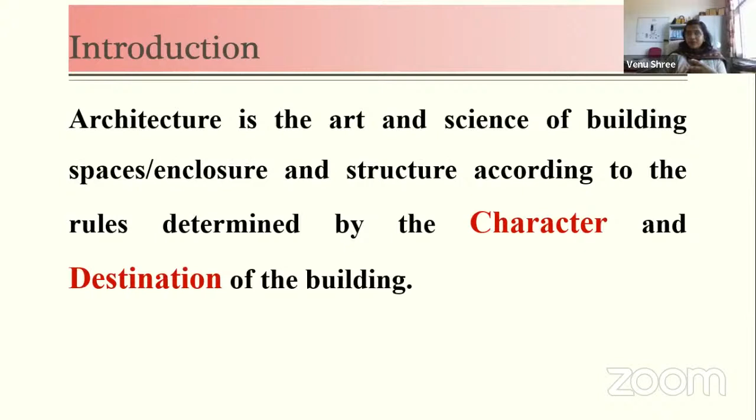Whenever I ask you what architecture is, your answer would be: architecture is the art and science of building spaces, enclosures, and structures according to rules determined by the character and the destination of the building. So there are two terminologies: character of a building and destination of the building. Character indicates a particular style of a building.

We have a specific style in early traditional Indian architecture of temples and forts. We have a particular style of churches, mosques, offices, modern buildings, and contemporary buildings. Every building has a particular style, and that style is related to the utilitarian aspect of the building. What utilitarian aspect is: it is related to the function of the building, the utility of the building, and the durability of the building as well.

Le Corbusier once said every building should have a character, just like a human being. As every human being has their own individuality, similarly every building should have its own character. The character of a building may evolve from a suitable combination of aesthetics and principles of design to evoke certain visual and psychological responses of the user—meaning the occupant or visitor of the building. And what are the principles of design? You all know they are rhythm, balance, emphasis, proportion and scale, movement, contrast, and unity. You have already studied it.

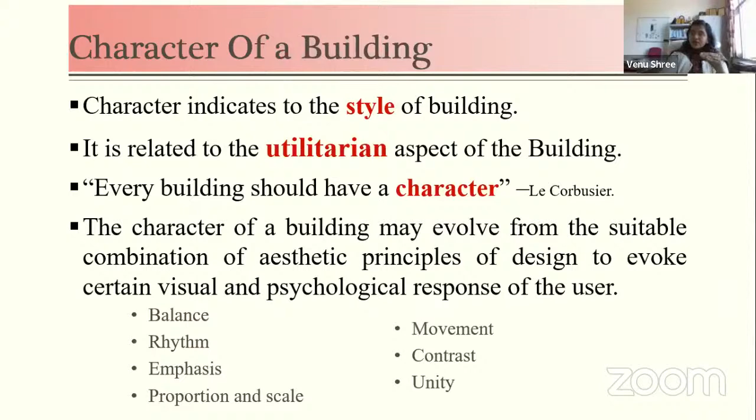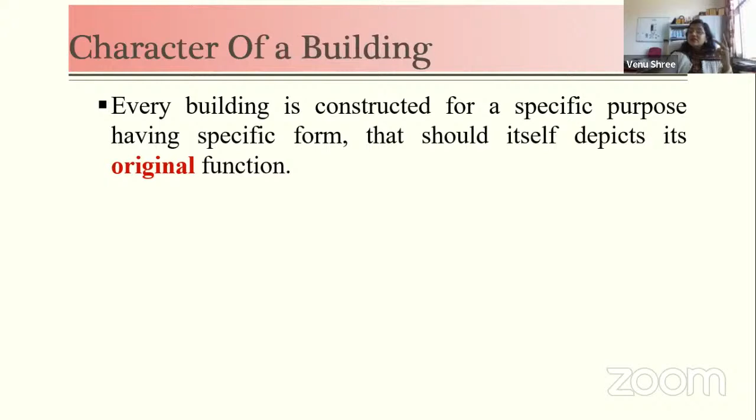Every building is constructed for a specific purpose, having a specific form, and it should depict its original function. The designer should always keep in mind the character of the building throughout the entire design process. Being a designer, an architect, an artist, we should always keep the character in mind from the very first line or the very first sketch of a new building. The exterior of a building should always express the internal function of the building, or the purpose of the building.

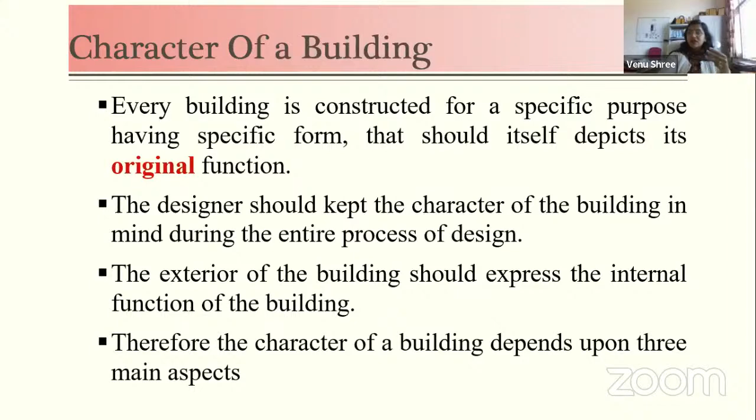Therefore, the character of a building depends upon three main aspects. The first aspect depends upon the use of the building, that is the functional aspect. The second aspect depends upon the influence of traditional material from ages, a traditional aspect like you may find in churches, mosques, temples, and forts. And the third is the human quality or emotional appeal.

And the personal character relates with the designer. In a single glance, you can identify the architect, the designer of a particular building. Let's discuss in detail.

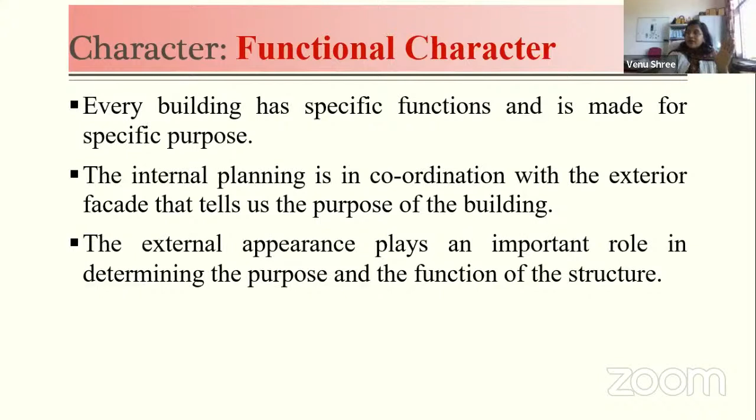Every building has a specific function, as we already know, and it is made for a specific purpose. The specific function is related and in coordination with the exterior facade that tells us the purpose of the building. So the external appearance plays an important role in determining the purpose and the function of the structure. It refers to a thought that if you visit a bank, it should look like a bank at first appearance. A shopping mall should look like a shopping mall from outside. It should not look like a hospital. And a hospital should not look like a bank or a shopping mall.

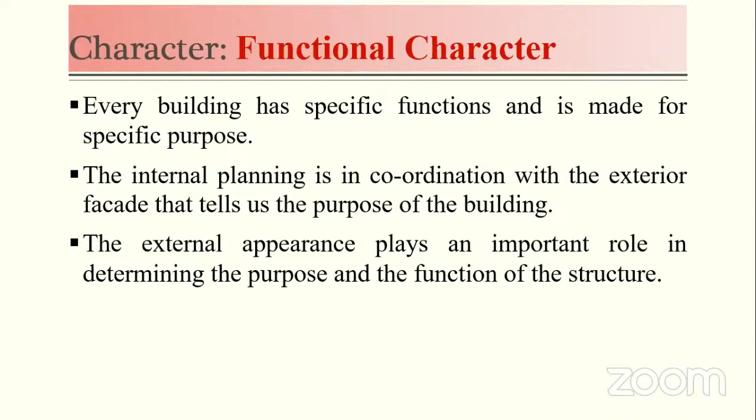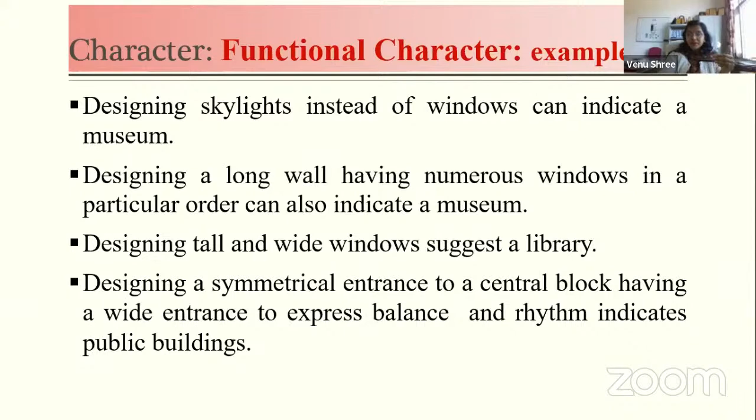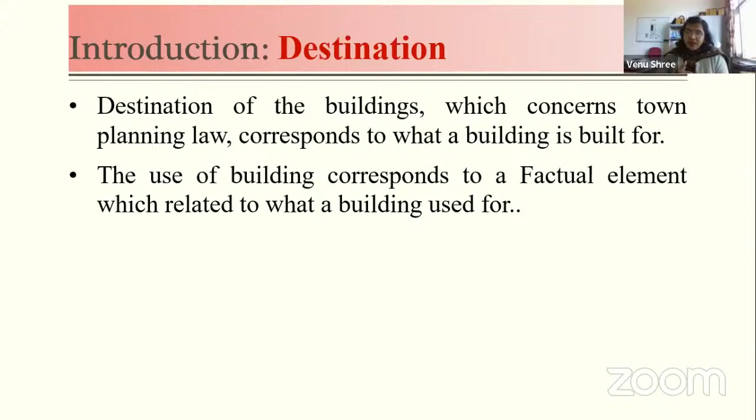Constructions that are impacted by the destination of the building are agriculture construction, housing constructions, trade and service activities, equipment of collective interest, and public services.

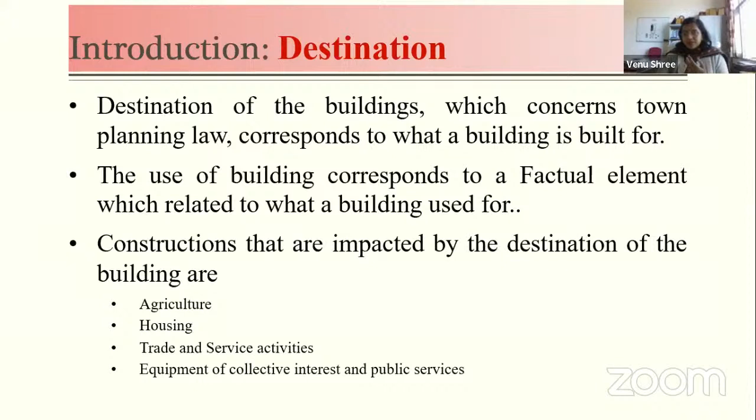For defining the character of a building, for giving a character to the building, it dictates the building form as well as building envelope. This consists of the dimension of space it encloses.

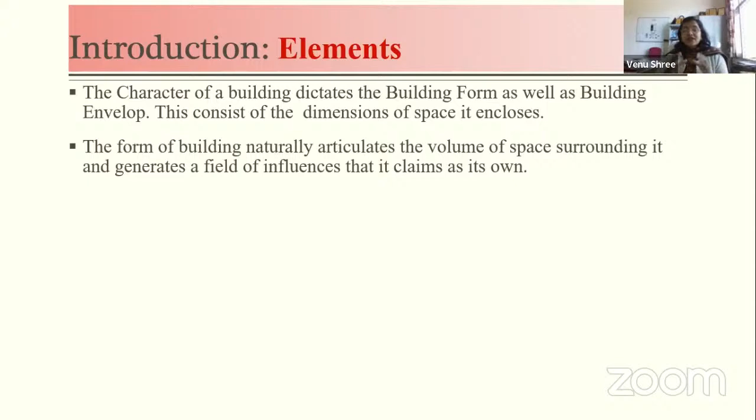The form of building naturally articulates the volume of space surrounding it and generates a field of influence that it claims as its own. The concept of space is made physically apparent in architecture through different elements that consist of basic identifiable parts of the man-made built environment.

These elements include the horizontal plane, which includes the base plane or floor plane, and the overhead plane, which is the roof plane. The vertical plane means wall planes and columns. Openings are doors and windows.

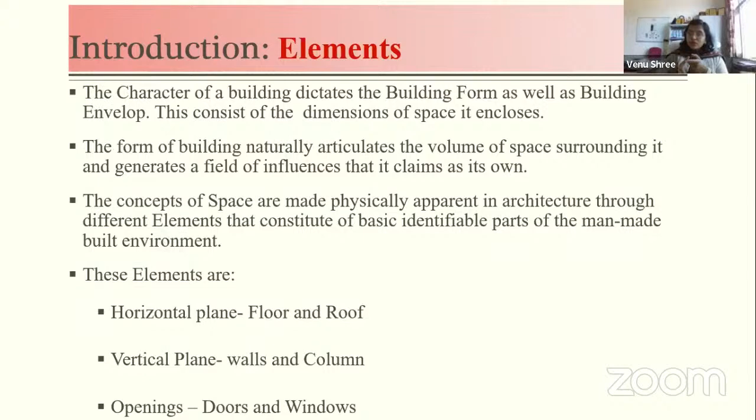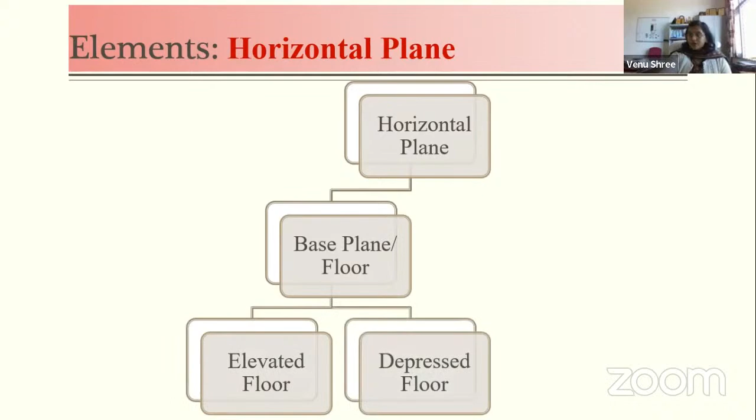Let's go to the horizontal plane. It has two parts: first is the base plane or floor, where we may have an elevated floor, a grounded floor, and a depressed floor. Second is the overhead plane, that is the roof.

The base plane is a horizontal plane, laying as a figure on a contrasting background, defining a simple field of space. This field can be visually reinforced in various ways. There must be a perceptible change in color, tone, or texture between the surface of the different plane and that of the surrounding area.

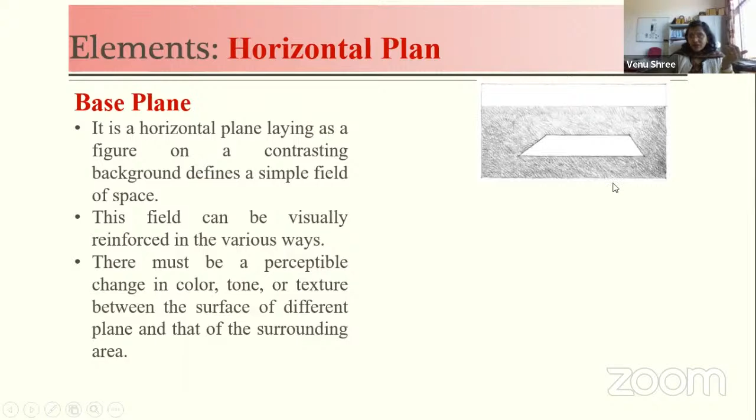As you see in this picture, this is the base plane and it could be differentiated with the help of color, tone and texture from the surrounding, and that surrounding is able to define its edge.

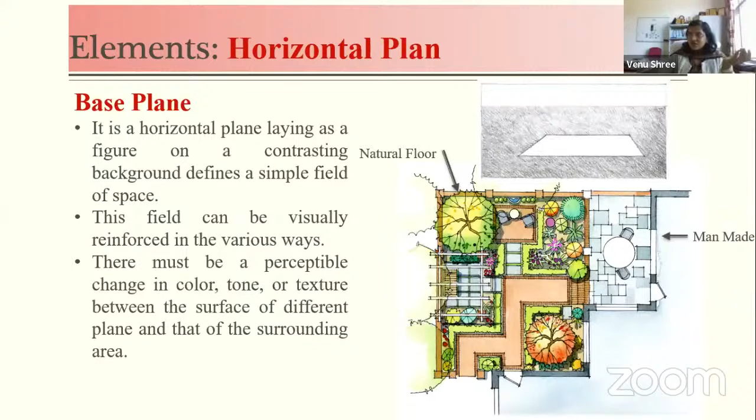Here we have a continuous flow of space. There is no change in height of the floor, so the continuous flow of movement is there, but the field still generates a spatial zone within its boundary. This space is visually separated with the help of texture and color.

If we look at the base plane as a movement guide, the surface articulation of the base plane is often used to define a spatial zone within a large context. It is a large context and the texture of the floor can generate a variety of floor surface.

These tiles add movement to it, and this green cover adds a sense of coolness in the landscape area.

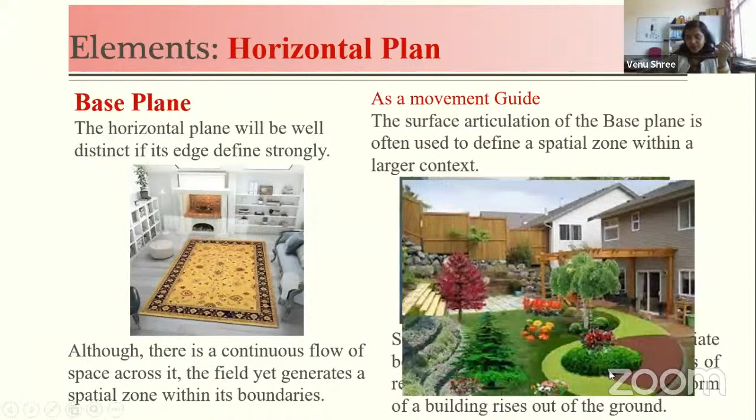Similar is the case in this particular picture. These patterns, the tiles, are guiding the movement, and the whole area is actually providing a field to generate this building form from it.

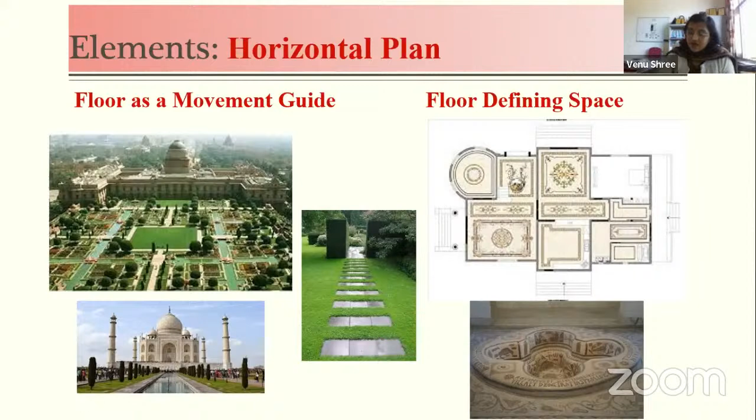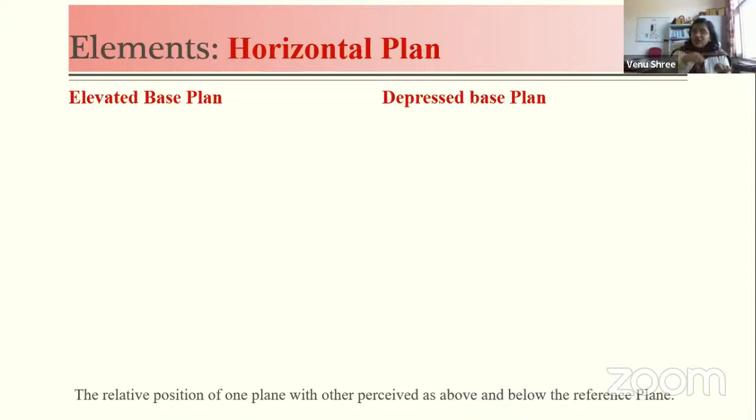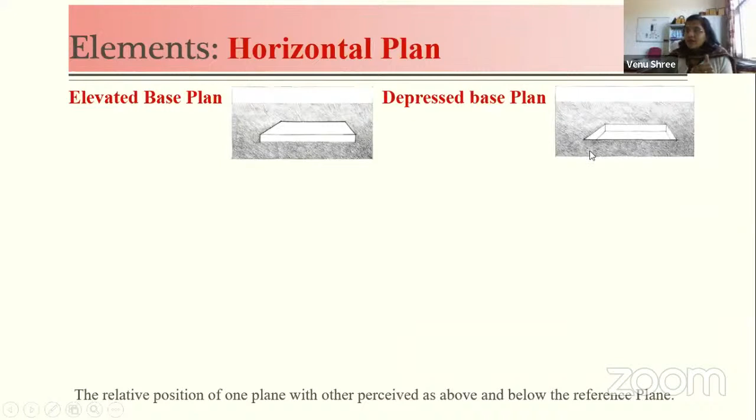Next type of horizontal plane is elevated base planes. The relative position of one plane with other is perceived as above and below of the reference plane. So if a ground plane is at 0,0 level, if the other plane is below it, it is known as a depressed plane, and if it is above the reference plane, it can be named as an elevated base plane. As you can see in these pictures, this plane is raised from the reference plane, therefore it is called elevated base plane, and this particular plane is depressed from the reference plane, therefore it is called depressed base plane.

In Sun Temple at Konark, the threshold height is introduced. A huge threshold height of monumental scale has been introduced by elevating the base plane. So this is the reference plane at 0,0 level, and the base plane, the floor, has been raised up to a monumental scale to add the supremacy of the supreme power to the structure.

Similarly, in the Chand Baori at Rajasthan, this particular base plane has been depressed, dipped out to perform a particular function. It has a particular purpose.

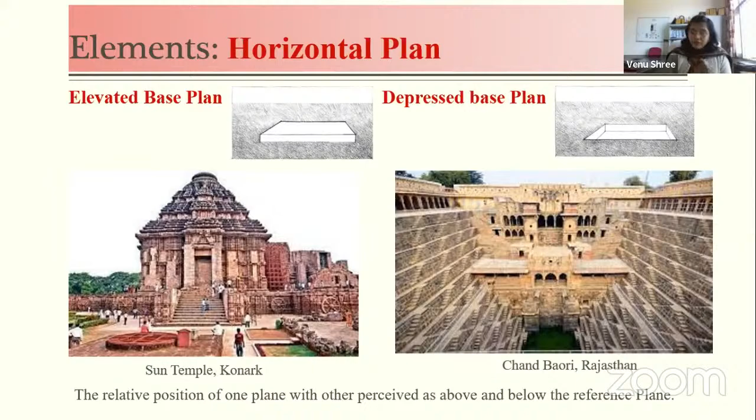Elevated base planes sometimes add a degree to which spatial and visual connectivity is maintained between an elevated space and its surrounding, depending on the scale of level of change. Scale of level of change means the level of change between two floors, between two horizontal planes.

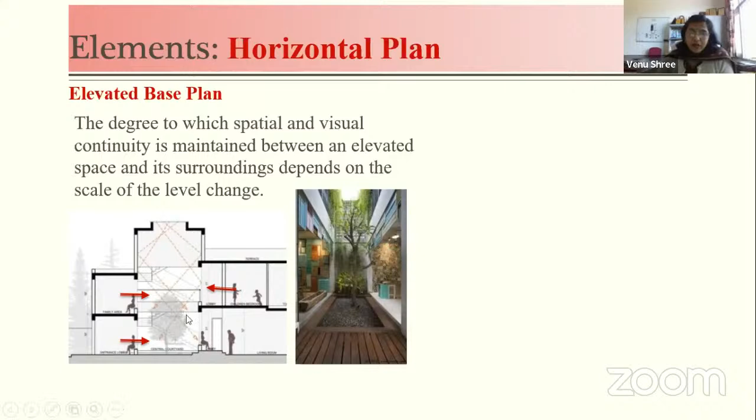Elevating a portion of the ground plane establishes a platform that structurally and visually supports the form and mass of a building. So this elevated floor is actually supporting the structure, acting as a structural and visual support. The elevated ground plane can be a pre-existing site condition, or it can be artificially constructed to deliberately raise a building above the surrounding context or enhance its image in the landscape, as you have seen in Sun Temple.

But here at Red Fort, it is a site constraint. So if you have a hilly site, if you have a contoured site, you will automatically get an elevated ground plane as a pre-existing site condition. But sometimes you have to increase this level.

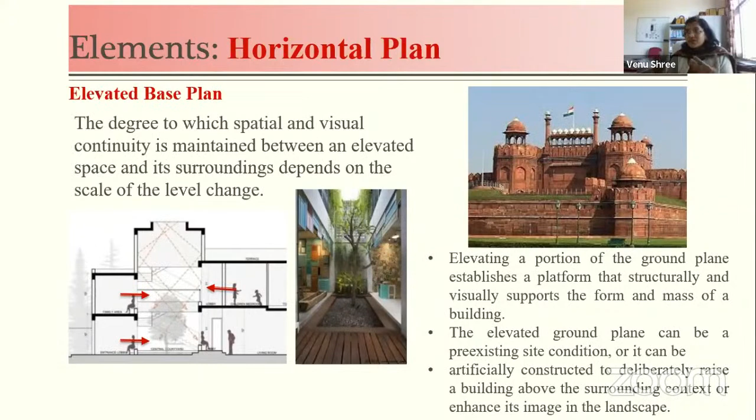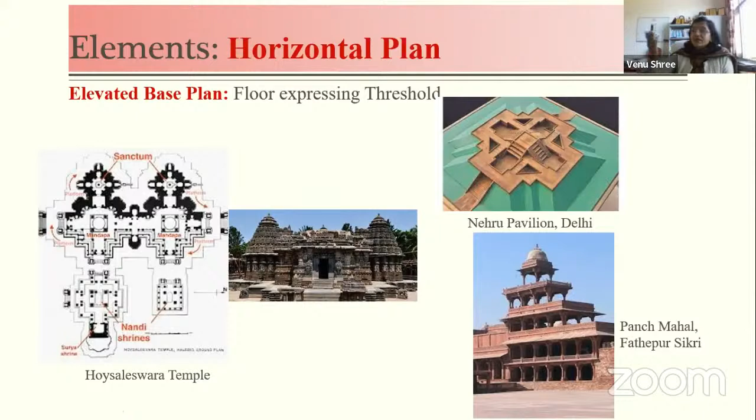Elevated base plane, plan floor expressing threshold. In Hoysaleswara temple, the combined base plane, the combined elevated plinth, is actually expressing the threshold height. Similarly, in Nehru Pavilion, the whole building is elevated on a base plane. And Panch Mahal is also an example of elevated horizontal planes.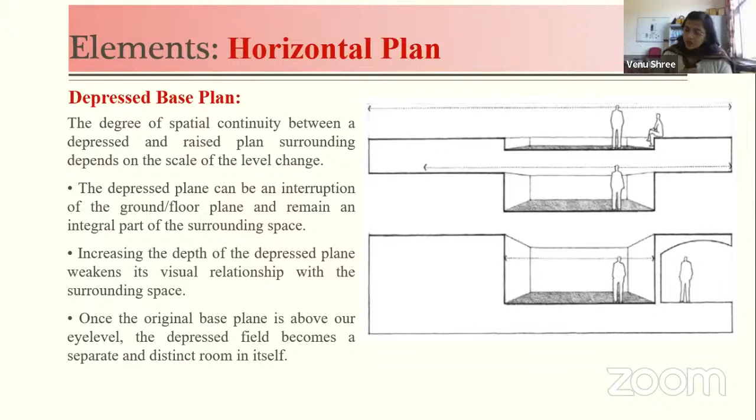This is NIFT Hyderabad, and the depressed field can be an interruption of the ground plane and remain an integral part of the surrounding, as you can see at the entrance of NIFT Hyderabad. By this change in horizontal plane, the architect has created a very interesting interacting space in the front. It is a multifunctional space which is used by the students for interaction and for their assignment exhibition. And this is the courtyard between three academic blocks in a U shape.

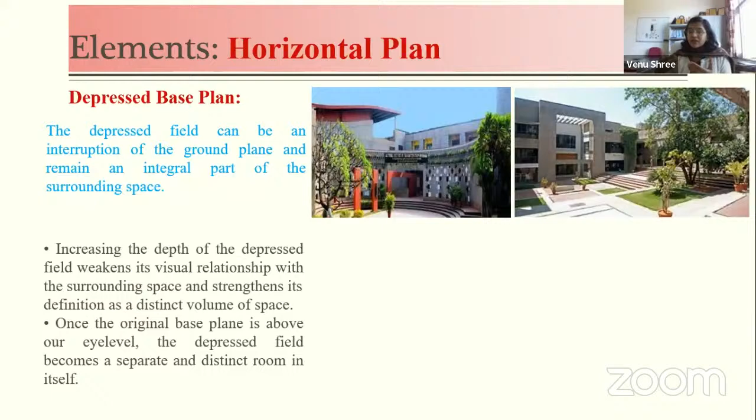So increasing the depth of the depressed field may weaken its visual relationship with the surrounding space, but strengthens its definition as a distinct volume of space, as we can see in this particular section. Once the original base plane is above our eye level, the depressed field becomes a separate and distinct room in itself.

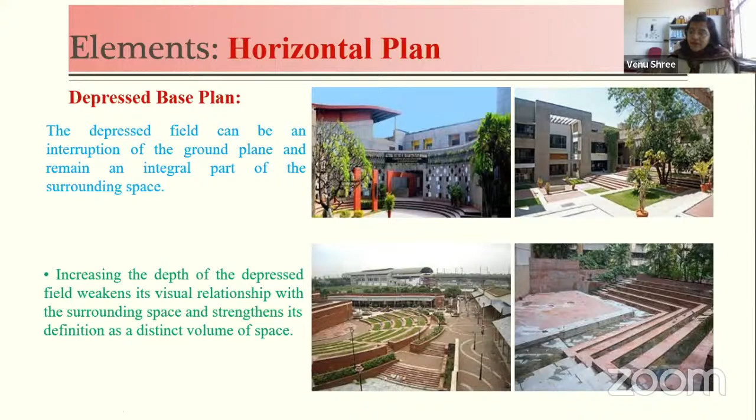As you can see here, these are the sections of Indian Habitat Center OATs. Here, the depression is more. Therefore, these spaces are used and strengthened as distinct volumes of space.

Creating a stepped, terraced, or ramped transition from one level to the next helps promote continuity between a sunken space and the area that rises around it, like this. It is Baoli at Imambara, Bada Imambara, Lucknow, and Agrasen ki Baoli at Delhi. We can see this transition in both the spaces.

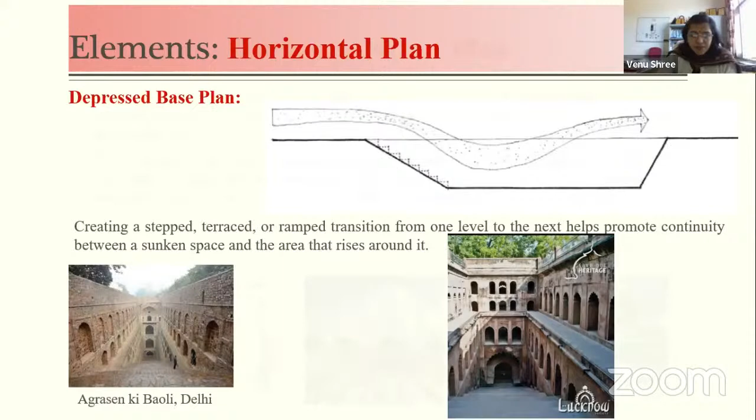Next plan is overhead or roof plan. The major overhead element of a building is its roof plane. It shelters the interior spaces of a building from climate, and has a major impact on the overall form of a building and the shaping of its space. So the basic function of roof is to provide shelter from climate, from wind, sun, rain, etc. But it also transfers its load with the help of the vertical supports.

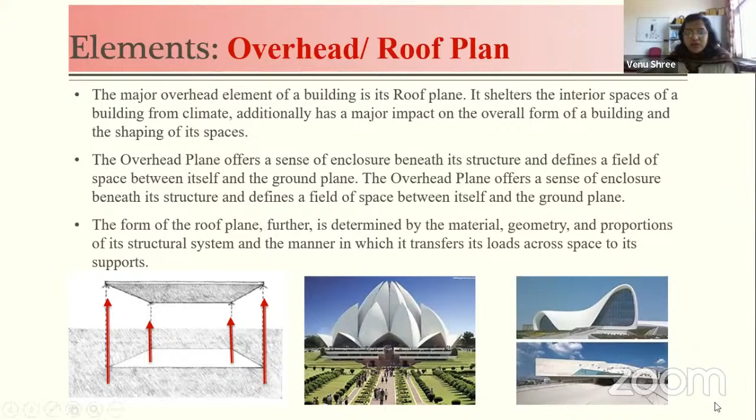The overhead plane offers a sense of enclosure beneath its structure and defines a field of space between itself and the ground plane. The form of the roof plane is further determined by the material, geometry, and proportions of its structural system, and the manner in which it transfers its load across space to its support. Here are two examples of roof plane.

Since the edge of the overhead plane establishes the boundaries of the field, its shape, size, and height above the ground plane determines the formal quality of the space, as you can see in these three pictures.

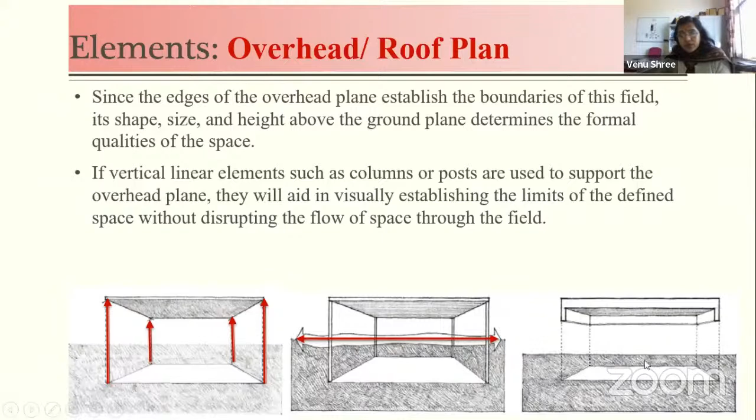If vertical linear elements such as columns or posts are used to support the overhead plane, they will aid in visually establishing the limit of the defined space without disrupting the flow of space, like this. So these columns are defining the edges of the roof, but they are not restricting the flow through the edge.

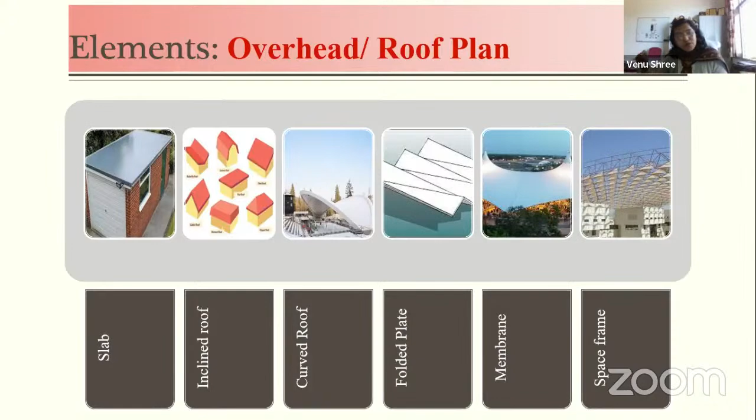We have a number of types of roof plane: the slab, the flat roof, inclined roof, curved roofs, folded plate roofs, membrane, and space frames. These types of roofing depend upon the invention of the material, and the invention of material with the passage of time, as well as the evolution of wisdom in man.

So this evolution is not as per chronological order, but as per the enhancement in the knowledge of human beings with respect to the material, with respect to the carving skills, and with respect to their change in lifestyle.

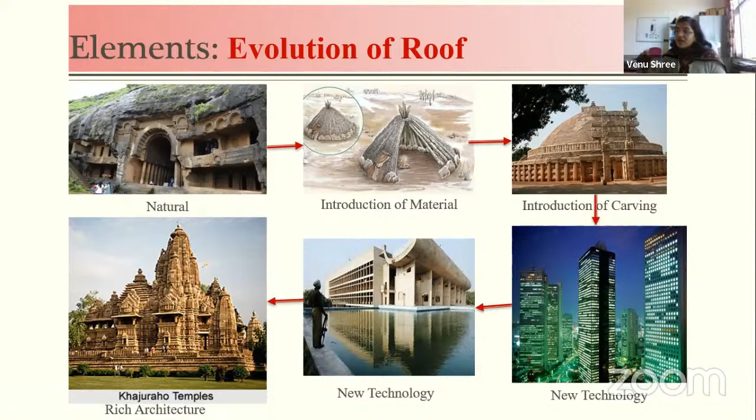Let's see the evolution of roof in terms of spanning capability. The flat roof, conceived as a solid mass held up by a supporting system, is visible in temples at Egypt, but the limited knowledge of the material limits the distance between columns.

Whereas in the Pantheon, the spanning capability increased through corbel and lintel, where gravity and material property were the main consideration. In Hagia Sophia, with the same material they used a more efficient way with the help of arches, vaults and dome. So when they became capable of understanding efficient use of the material with the help of different technology—arches, vaults and domes—they were able to increase the span of the building, because the purpose of the building in these three structures was the same, but the internal span is different.

So the evolution of church form shows an attempt at lightening the support members, bringing natural light in, and increasing the open spaces with the help of construction technology.

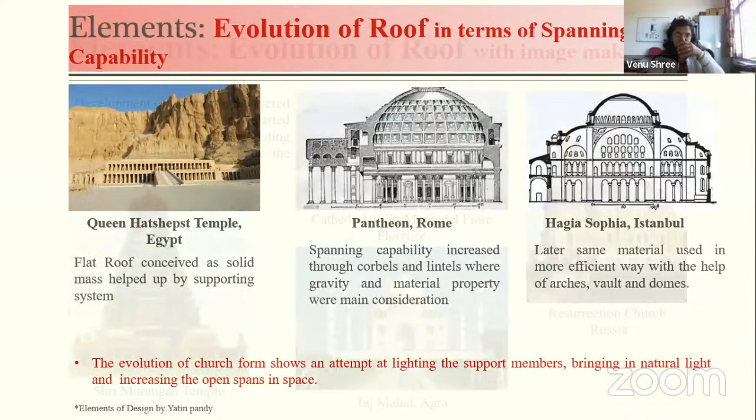Evolution of roof with image maker. Image maker is directly related with the character of the thing. So development of the roof in sacred and public buildings primarily started as a pragmatic approach of negotiating material span and to facilitate the collective nature of space.

Like in Murangan temple, you can see a completely different style of roofing with use of vibrant color on it and with a specific style of carving. Whereas at Saint Maria del Fiore Cathedral at Florence, the onion dome and the square tower with symmetric balance shows a specific image of church.

Similarly, in Taj Mahal also, and the Russian church, the onion domes with different colors were able to introduce an individual image of the structure.

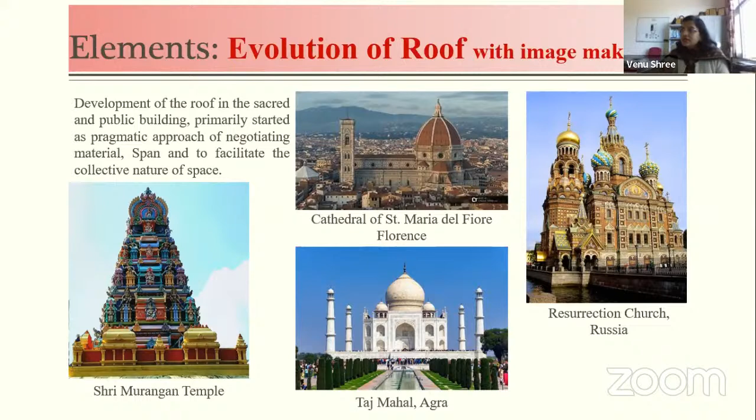Roof as a spatial enclosure. There are some structures where roof becomes a spatial enclosure, with no walls found at all. You will find only the roof, which actually encloses the whole space. So the roof, canopy or ceiling provides an enclosing surface which defines the interior space dramatically.

As you see in Lotus Temple, it has a square plan and a circular plan. Matri Mandir at Auroville is also a temple, but with an entirely different form. The exhibition pavilion at New Delhi had its whole space covered with the help of a honeycomb structure in roofing.

Hussain Doshi Gufa has only roof, there is no wall there. And the latest great building by Zaha Hadid, the Hyder Aliyev Center, has only roof and roof, there is no wall. So Zaha Hadid is also known as the queen of curves, and she encloses the whole building with the help of a curve.

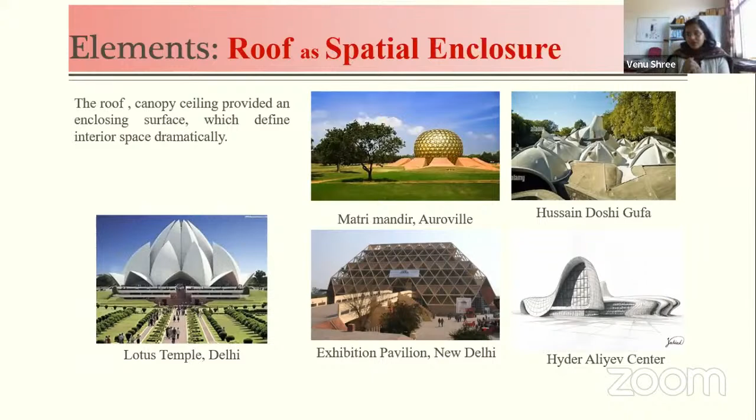Next, the vertical elements. So we have discussed the ground plane, the roof plane, and the next very important element, the vertical element, which actually defines a degree of enclosure to a space. Vertical elements are columns and walls.

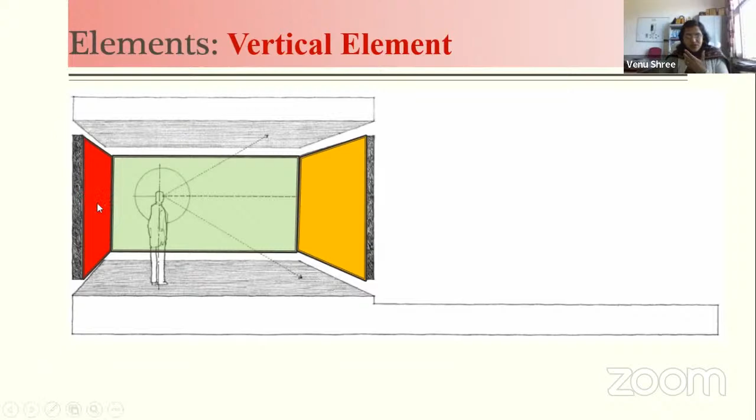In this picture, you can see there are three vertical elements. Vertical planes have a significant presence in our visual field than horizontal planes. They are more important because whenever we visit a space, our first vision is on the wall. Therefore it is more instrumental in defining a detached volume of space and providing a sense of enclosure and privacy for occupants.

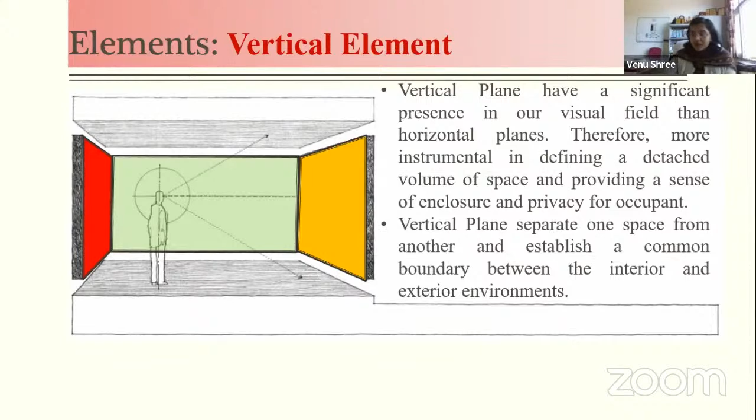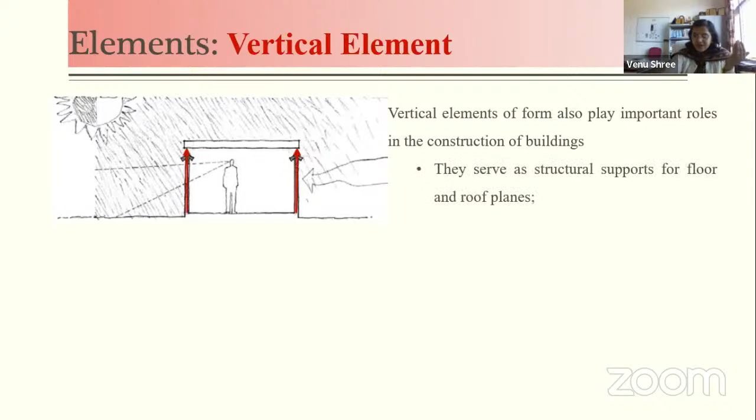Vertical planes separate one space from another and establish a common boundary between the interior and the exterior environment. So vertical elements of form also play a very important role in construction of the building. They serve as a structural support for floor and roof planes. They provide shelter and protection from climatic elements, and they also aid in controlling the flow of air, heat, and sound into the building, meaning ventilation.

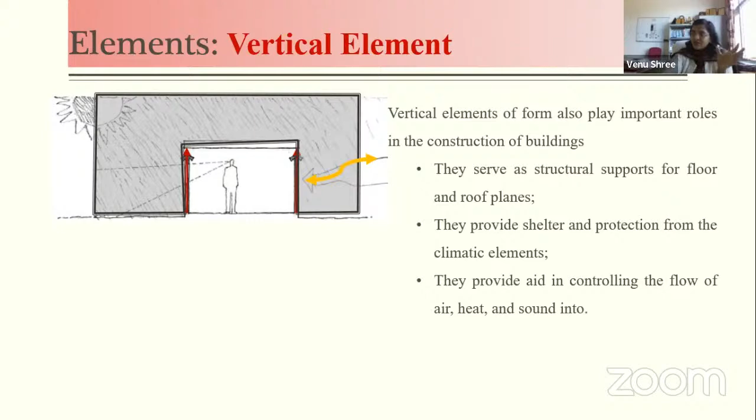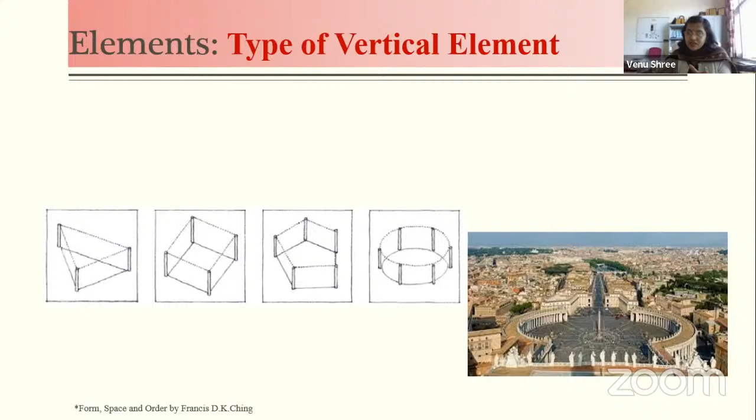And the smallest vertical element, the column, without having a complete enclosure, has great potential for marking a space. As you can see in these figures, only columns without a continuous wall can demark a space, can visually cover a space into it like this.

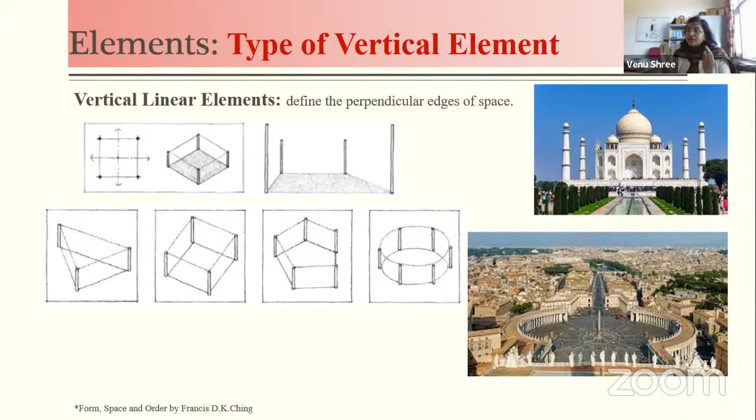Vertical linear elements define a perpendicular edge of a space. As you can see in the Taj Mahal, these minarets are actually defining a perpendicular edge of a space. So with the help of these minarets, the scale of the Taj Mahal has been increased.

So we have four types of vertical elements. Vertical plane: a single vertical plane articulates the space on which it fronts. If you have a single vertical plane, the space towards which it fronts depicts a space. A vertical plane has a frontal quality.

Its two surfaces or faces establish the edges of two separate and distinct spatial fields. As you can see at Saint Agostino, Rome, with one plane, the rest of the building cannot be seen, but the front plane is actually demarcating the front of the building - the single vertical plane. Similarly, India Gate at Delhi also showcases this character. And Arch of Septimius Severus at Rome is also a very bold example of this type of single vertical plane.

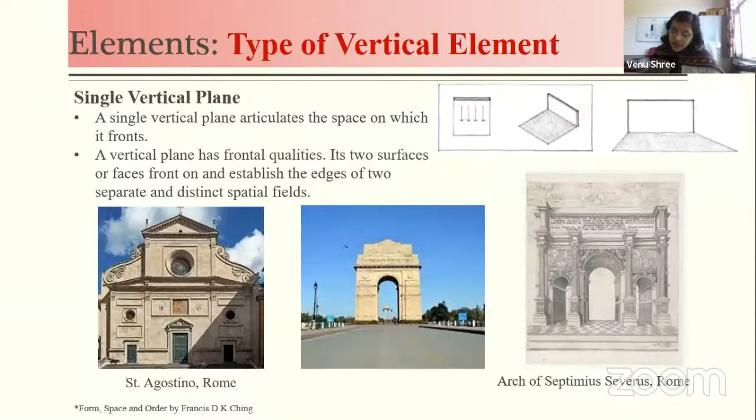L-shaped plane. An L-shaped configuration of vertical planes generates a field of space from its corner, like this. The introverted field at the interior corner becomes extroverted along its outer edge, like this outer edge.

You can see in this particular composition of wall plane and base plane, if we introduce an opening here by sliding this plane, this type of sliding loses the degree of closeness, the degree of enclosure to it. It all becomes a free space. This L-shaped plan is an example of L-shaped enclosure in which the building block is placed in connection with the adjacent ground.

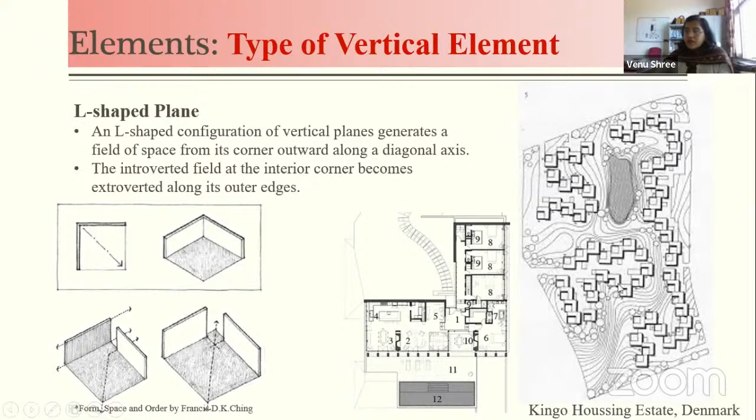Next type of vertical planes are parallel planes. The two vertical planes define a volume of space between them that is oriented axially towards both open ends of the configuration. The two planes are not connected with each other; they are two separate identities, but they define a space significantly.

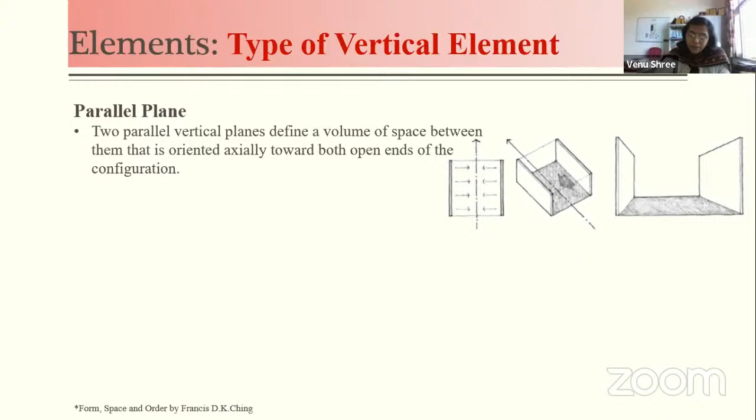The nave of a basilican church is a very good example of it. And when we connect these two parallel planes, either with the help of columns or with the help of a roof, the degree of enclosure will be enhanced.

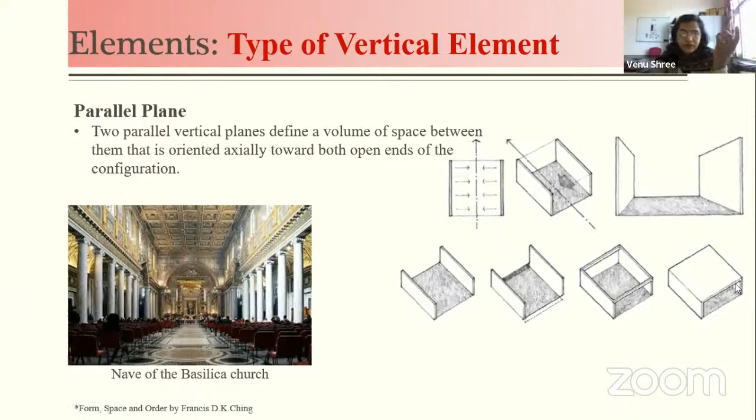A U-shaped configuration of vertical planes defines a field of space that has an inward focus as well as an outward orientation.

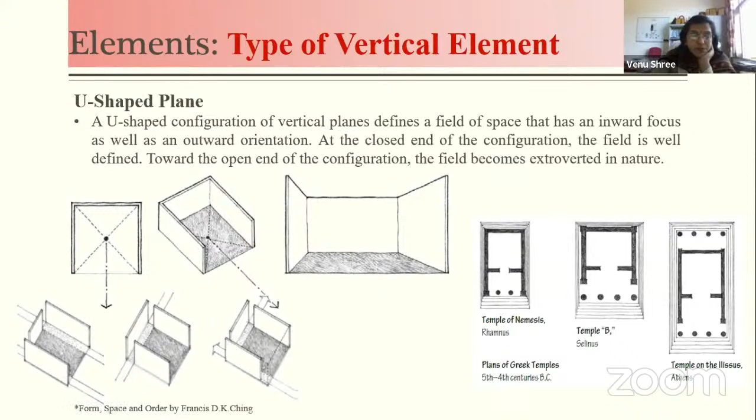U-shaped planning can be seen significantly in Piazza del Campidoglio at Rome and Mayur Chowk in City Palace at Udaipur.

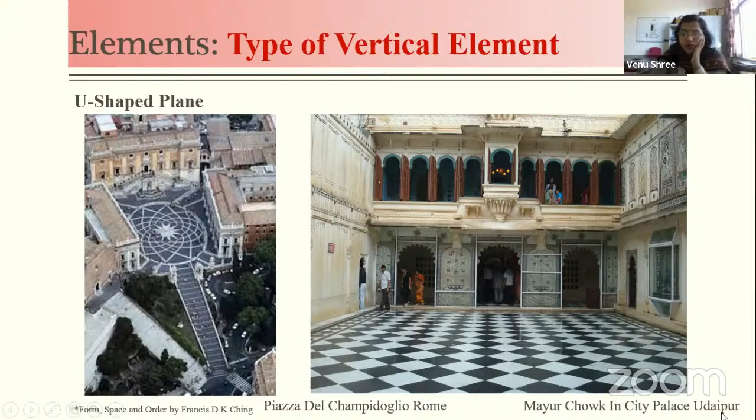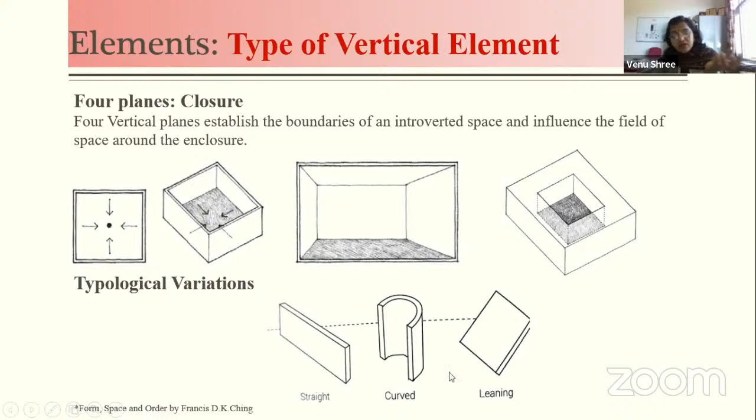Four vertical planes establish the boundaries of an introverted space and influence the field of the space around it. You can see a rectangular enclosure at the plan of Ibrahim, tomb of Sultan Ibrahim, Bijapur, India.

In curved form, we can have a look at the Lotus Temple at New Delhi, in which the main plan of the building is in circle. And yes, the Colosseum is a very good example of curved surface.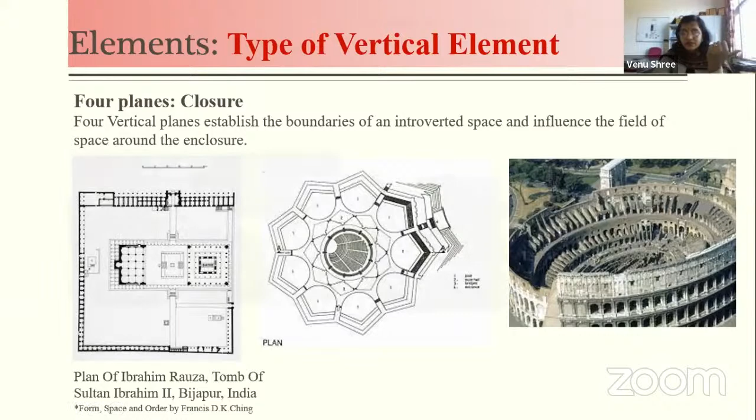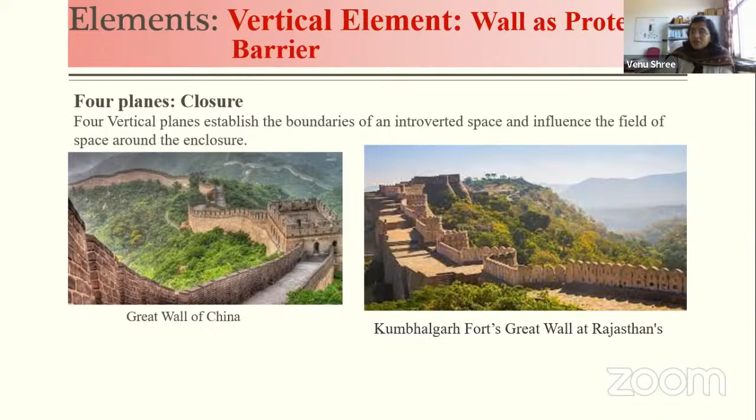Walls may also be used as a thin transparent plane, differentiating the indoor environment from the outdoor. Crystal Palace, London is a good example, along with the glass house in the botanical garden at Lal Bagh. They both showcase the introduction of new material, new technology to the building, and provide a very thin transparent plane.

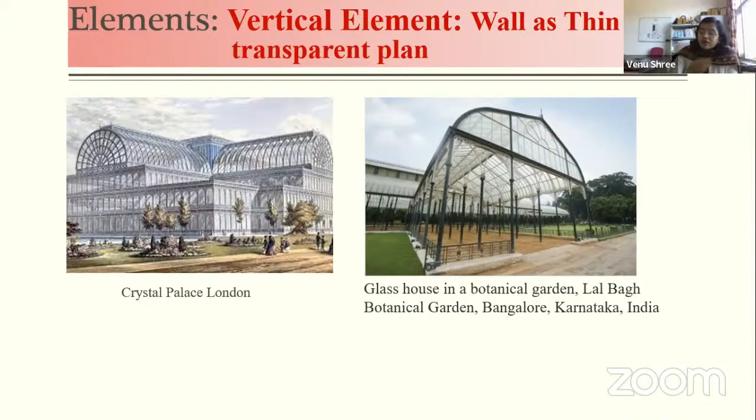Wall, the vertical element, can also be used with display and storage. These type of niches are very common in traditional buildings and residences till date.

These displays the function of a wall as storage and as a display. The walls of traditional temples have been used as a display of stories. So these walls have already been used as a storyteller.

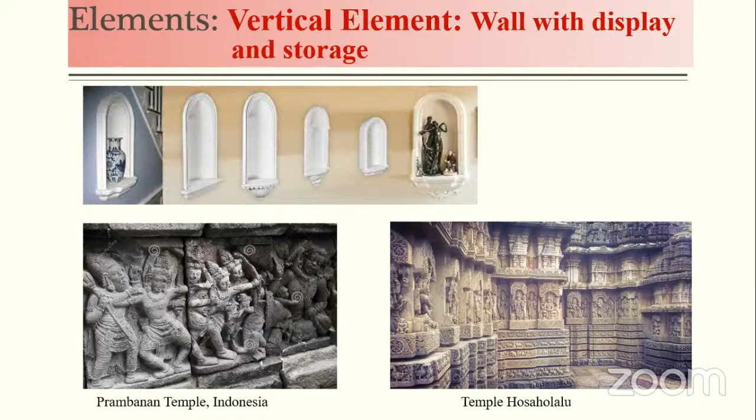Hello, Venu Shree, ma'am. Ma'am was disconnected, my dear budding architects, so I am trying to contact Venu Shree, ma'am. Please join again, ma'am.

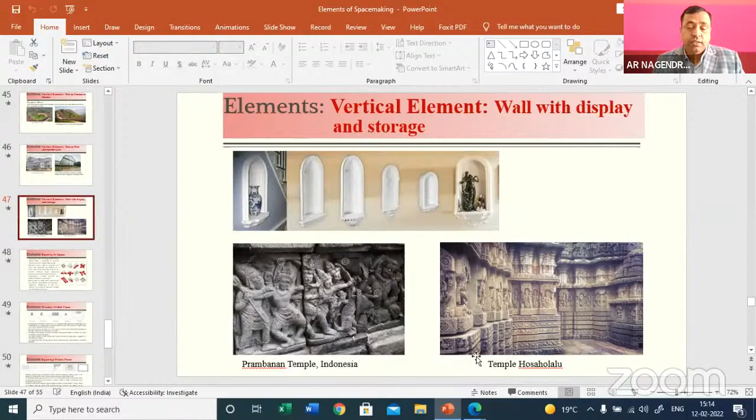Yes, sir, yes please, I don't remember where I left the connection. You were just displaying the wall as storage and display. Okay, okay, wall as storage and display. I think you are here. Yes, yes ma'am, okay, please continue, ma'am. Okay, okay sir, so I was discussing the wall as a display and storage.

These type of niches can be seen throughout history. We can see these type of niches in chaityas, in forts, in temples, even in churches, in all types of traditional buildings. The wall has been treated as a display or as a storyteller in our ancient temples, as you can see in Prambanan temple, Indonesia, and the temple of Hosaholalu.

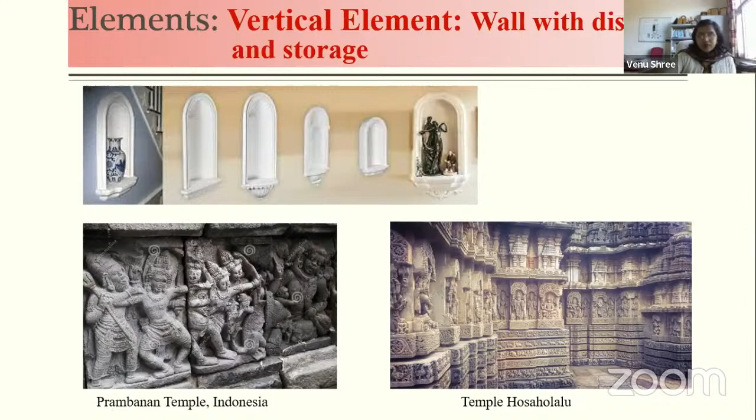Next, I am discussing the opening in space. The openings in the enclosing planes of any spatial field are necessary to provide spatial as well as visual connectivity. We have one enclosure of space, and in any building we need to connect one space with another space, and for that we have to introduce some type of opening between them.

How many types of openings do we have? We have two types: windows and doors or arches. Windows allow light to penetrate the space and illuminate the surface of a room. They offer views from the room to the exterior. Windows establish visual connection between the indoor environment and the outdoor and adjacent environment.

Additionally, a window provides natural ventilation of the space, which is very important for the dilution of indoor pollution, and introduction of fresh outdoor air into a particular space.

Door offers an entry into space or a room and influences the pattern of movement. Openings, depending on the size, number, and location, may also weaken the sense of enclosure, or the degree of enclosure of the space.

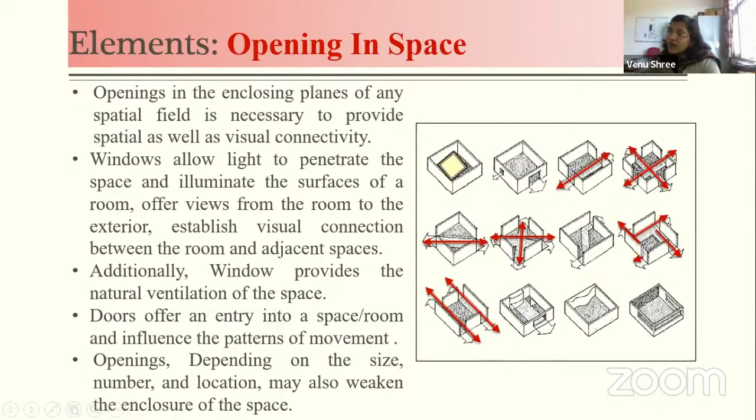Window within plane. A window can be provided in three manners. The first style is providing a window within a plane. If we treat the plane of any wall as a vertical plane, we can provide a window on it by placing it at center or off center, or we can group two to three windows together.

We can deep set one window, or we can provide a window on the sky, which is called a skylight.

An opening located wholly within a wall or ceiling plane often appears as a bright figure on a contrasting background when it's centered within the plane. The opening will appear stable and visually organize the surface around it, as you can see in this plane.

Moving the opening off center, as soon as we make this window off center, it will create a degree of visual tension between the opening and the edge of the plane towards which it is moving along.

If the shape of the opening is similar to the shape of the plane in which it is located. It will create a redundant compositional pattern.

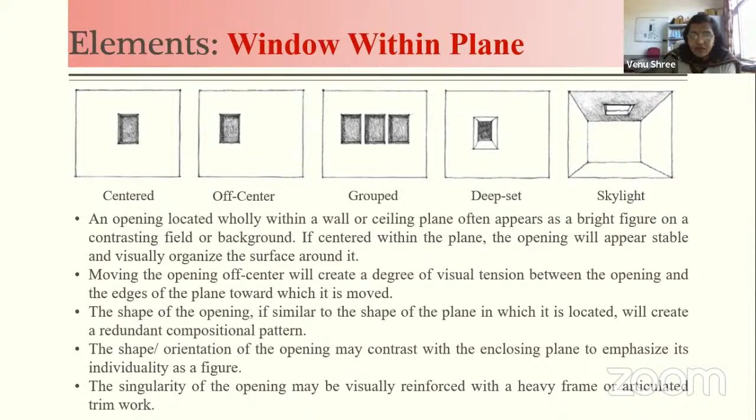Multiple openings like this may be clustered to form a unified composition within a plane, or be staggered or dispersed to create visual movement along the surface of the plane.

As an opening within a plane increases in size like this, it will at some point cease to be a figure within an enclosing field and instead become a positive element in itself, a transparent plane bounded by a heavy frame.

Openings within planes naturally appear brighter, like this, as they allow lighting into the space and illuminate the spaces.

If the contrast in brightness along the edge of the opening becomes excessive, the surface can be illuminated by a second light source from within the space, or a deep set opening can be formed to create illuminated surfaces between the opening and the surrounding plane.

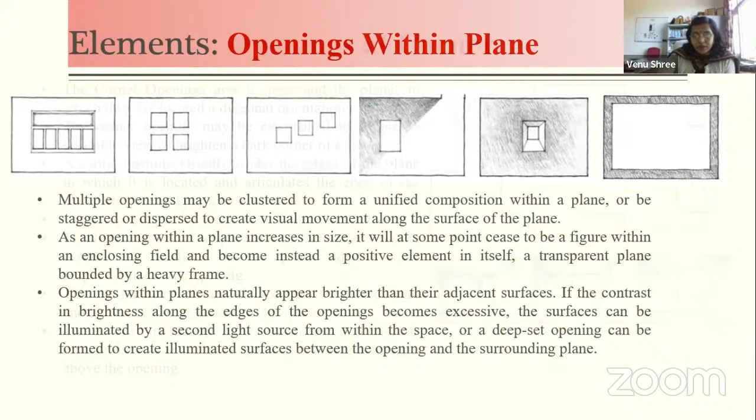Openings at corners give a space, and the plane in which they are located, a diagonal orientation like this. So the corner opening may be established to capture a desirable view, and brighten a dark corner of a space. The corner openings visually erode the edge of the plane.

These corner openings change the edge of the space, the edge of the plane in which it is located, and articulate the edge of the plane. It also articulates the edge of the adjacent plane, perpendicular to it.

A large opening like this can weaken the sense of the corner or edge, but the light that enters a space through a corner opening washes the surface of the plane adjacent and perpendicular to the opening.

This illuminated surface can be enhanced further by turning the corner with the opening, or by adding a skylight above it, like this.

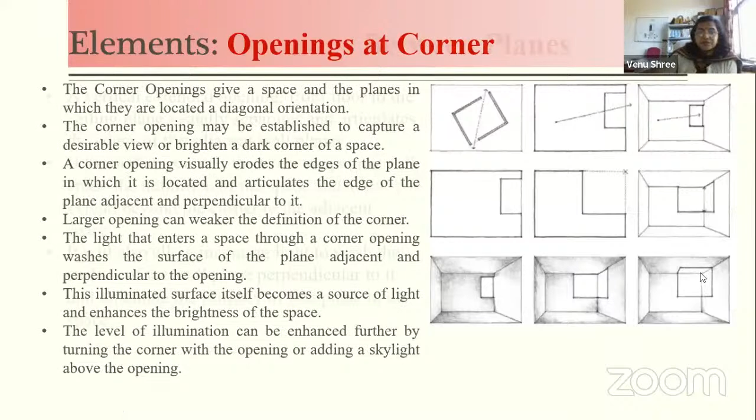A vertical extended opening towards the roof, from floor to ceiling plane, visually separates and articulates the edge of the adjacent wall plane. If located at a corner, the vertical opening will erode the definition of the space and allow it to extend beyond the corner to the adjacent space. It will also allow incoming light to wash the surface of the wall plane perpendicular to it and articulate the primacy of that plane in the space.

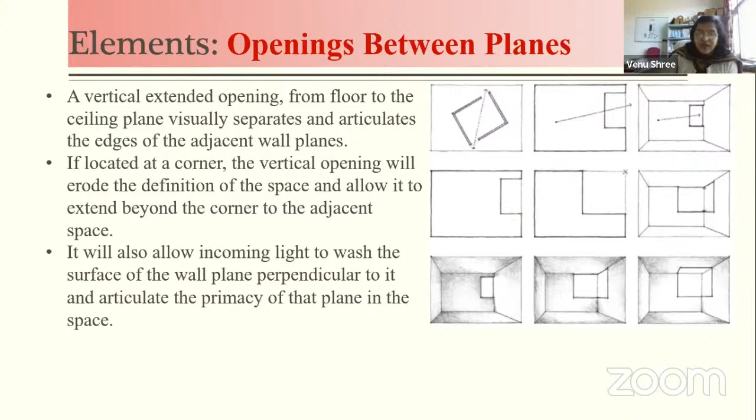The next type of opening can be provided between planes, meaning horizontal and vertical planes. A horizontal opening that extends across a wall plane will separate it into a number of horizontal layers - one layer, two layers, three layers.

If the opening's depth increases to the point where it is greater than the bands above and below - as you can see, two bands, one above and one below the window band - then the opening will become a positive element bounded at its top and bottom by heavy frames.

Turning a corner with a horizontal opening reinforces the horizontal layering of a space and broadens the panoramic view from within the space. If the opening continues around the space, it will visually lift the ceiling plane from the wall plane and isolate it, giving it a feeling of lightness.

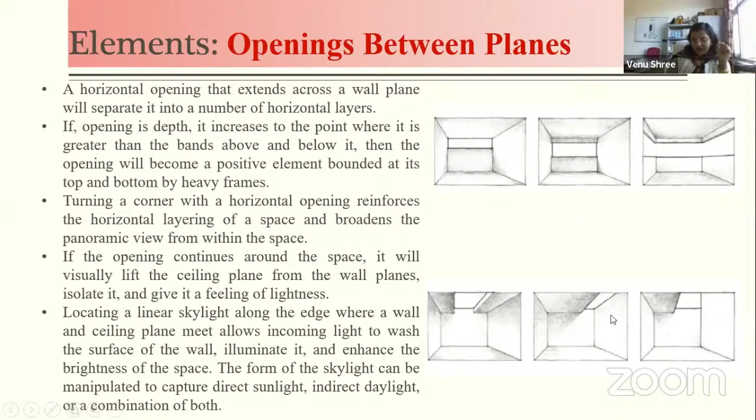Locating a linear skylight along the edge where a wall and ceiling plane meet allows incoming light to wash the surface of the wall, illuminate it, and enhance the brightness of the space. The form of the skylight can be manipulated to capture direct sunlight and indirect daylight, or a combination of both - direct sunlight can enter like this, and indirect light can also be allowed.

So these are the bibliography of this presentation. I had referred to Elements of Design by Yatin Pandey and Form, Space and Order by Francis Ching.

So this is all. I am open to questions now.